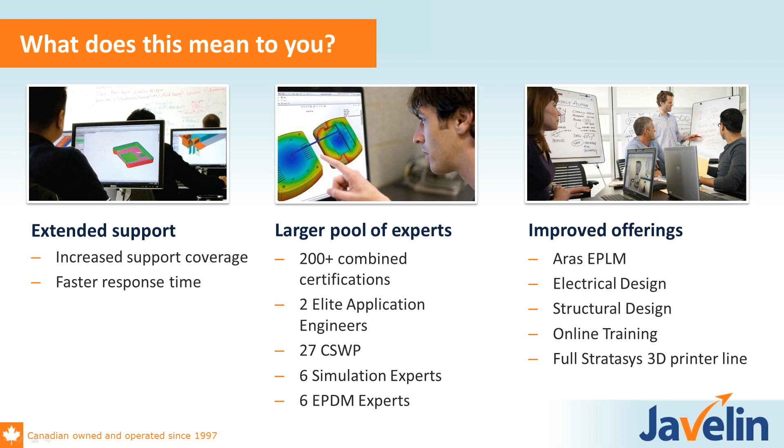Lastly, I did want to announce that Stratasys has purchased our supplier Objet for 3D printing, so we now have access to the complete Stratasys product line. That's really exciting and great new technology we can share with you.

On the training front, we have a number of new offerings we've been working on this year. We have flex day programs where customers who aren't sure exactly where to allocate training purchase a bulk number of days in advance and can allocate them per student per course after the fact. That's quite nice. Online training has been a growing area for us, especially for advanced courses or ones that are difficult to fill a room for locally - we're able to host those more regularly across the country, which is nice.

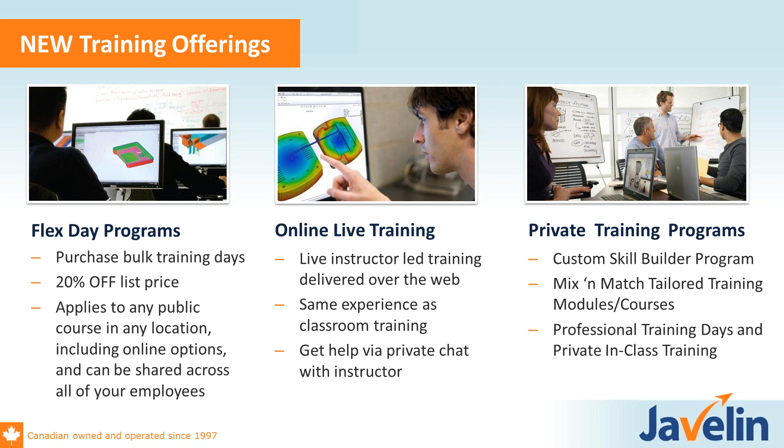And then of course custom stuff for you - custom skill builder, mix and match programs. The idea is to take the content and skills that we have and align them with your industry and requirements to take the next steps with SolidWorks.

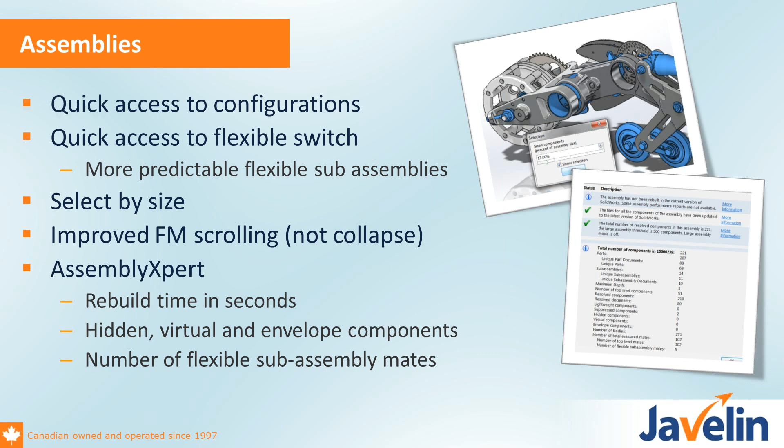Working with mates, there's some new options with how we're viewing mates, so you can view them based on a selection on edges or features, so you can see what interacts with it.

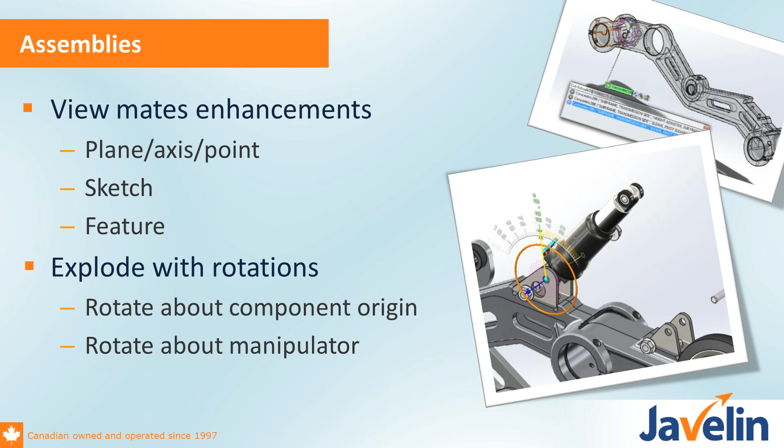Probably one of my favorite enhancements in assemblies this year is this new rotation explode. In the past, we could just pull it linearly along the axes, and now we can rotate around an axis or a circle, and that makes it really easy to communicate step-by-step assembly instructions right with core SolidWorks.

There are some improvements with how we handle messaging for in-context sketches. You'll get warned if you're editing a sketch right at that assembly level, so you can think twice. Maybe you want to add that in the part, which might make more sense in many cases.

Lastly, there's some really nice improvements to mirror components. This has been an area of development for a good while. We've seen more and more go into mirror over the years, because there are so many customers out there that have symmetric design, so it makes sense to support really everything that way. We have a whole new list of areas that we're supporting.

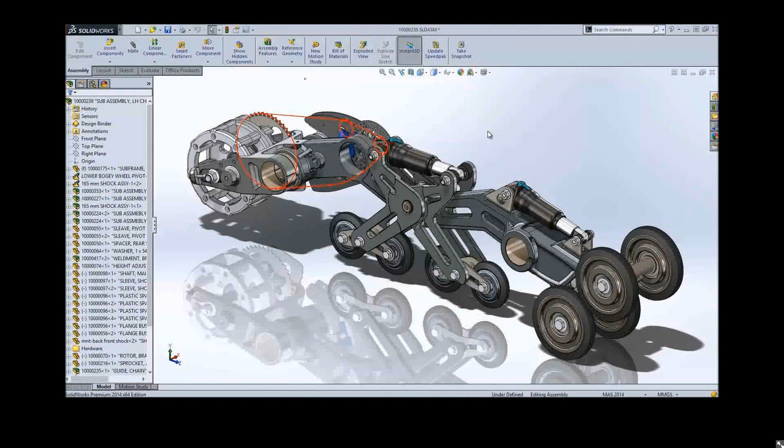So yeah, we'll get right into this with some what we call assembly delighters. Really these are things that SolidWorks has added in 2014 just to make it a little bit easier and a little bit more fun for us to use SolidWorks 2014.

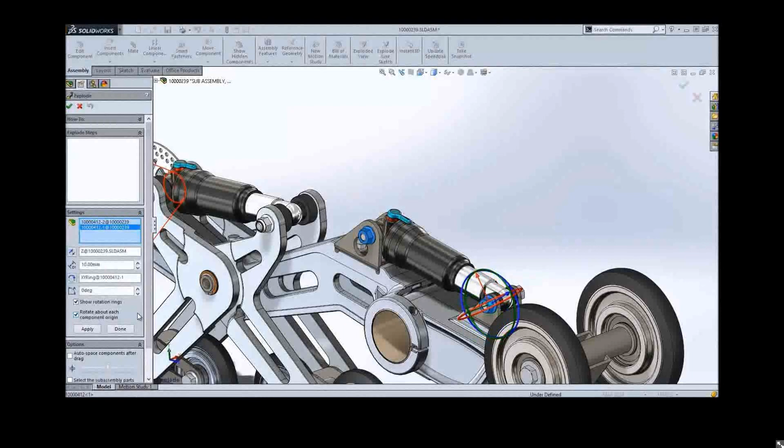First, as Eric mentioned, the new explode or rotate explode command is now available in 2014. You can take advantage of this to do a lot of different really interesting things when you explode components. For instance, these two nuts here, we can actually pull them off and have them rotate as they're coming off, so it looks like they're unscrewing when they come off.

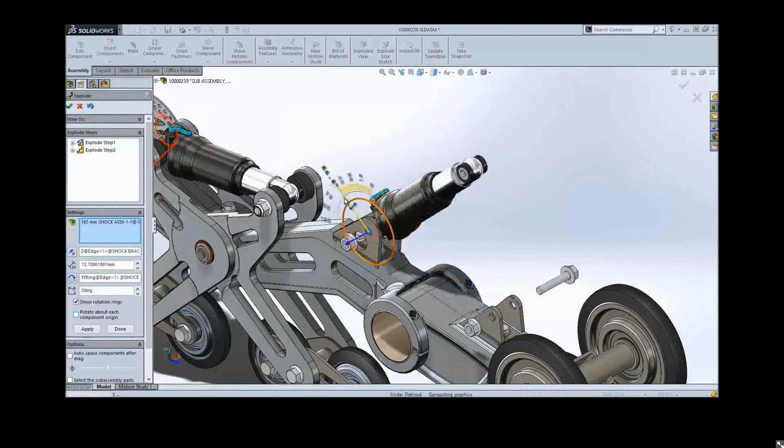And then of course we also have access to the regular linear explode too. So this triad that we're used to now has arrows and rings. The rings basically allow it to rotate, and the arrows allow you to pull it in some linear X, Y, Z direction. You can have a combination of both rotate and linear at the same time, as we showed with the nuts.

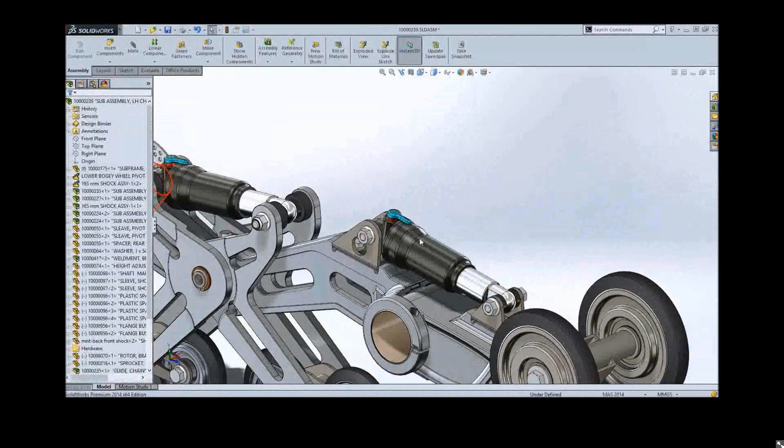So it does offer a really nice way to show this. I love to animate these explodes, especially now with rotate explode. It's a really good way to convey how to take apart or assemble your machine. It's a really nice feature, and one of my favorites in 2014.

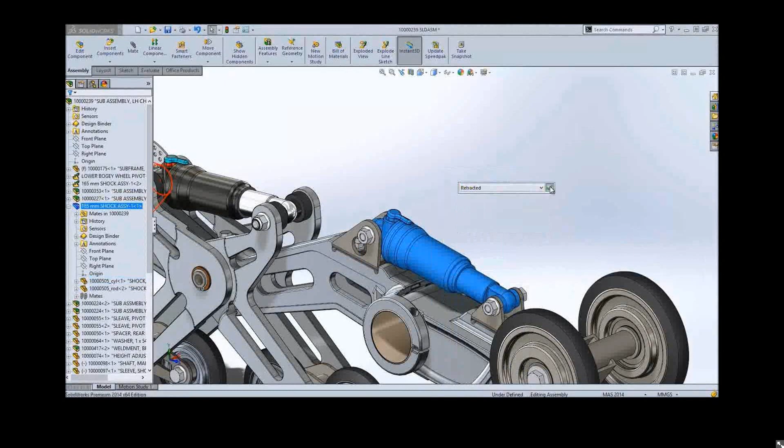Also, as Eric mentioned, when you're identifying and changing configurations in the assembly, it's now much easier because they're accessible right from the context menu. So now all you have to do is click on any component, and automatically it'll have a pop-up where you can choose the proper configuration, so you don't have to right-click and go to Properties.

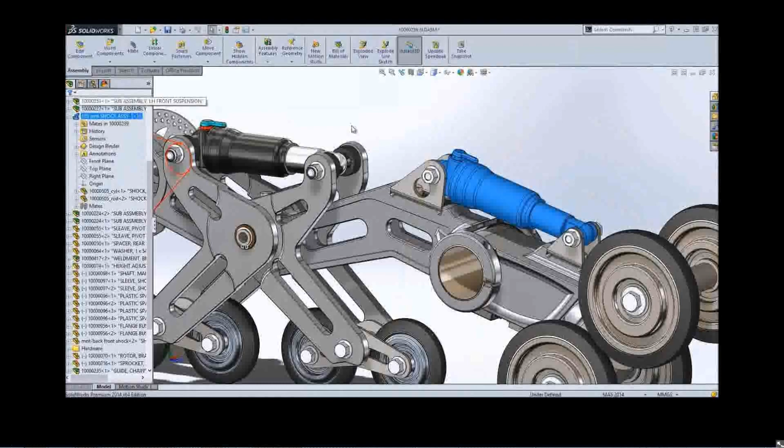It's a lot quicker to choose configurations, and also for flexible subassemblies, there's now a separate button for that, so you can make assemblies flexible without having to go into Properties. Some really nice things - I'll wrap it up there for the assemblies, but really just explode, rotate, configurations, flexible. They're really making everything a lot easier for us to control our environment in 2014.

So next up on the assemblies is discussion on mates. There's some really nice enhancements with just how easy it is to work with mates. They're constantly trying to make it easier because that's just an area that we spend so much time driving within SolidWorks when you're working on the assembly level.

First off with Smart Mates - if you recall, Smart Mates is where you can drag faces on top of other faces by holding down the Alt key. You can even do that if you have a part open in another window and drag it into an assembly by whatever face you're holding, and you don't have to use the Alt key in that case. But regardless of the method, the Smart Mate functionality used to always snap to everything, and what they did is add an option so you can now control the sensitivity, which is really nice to make it more usable. The Smart Mate button, also on the default mate behavior.

There's some nice enhancements where it will automatically select a default mate that does not over-constrain the design. In the past, you could have defaulted to coincident, which didn't always make sense. And on concentric, similarly, axis to cylinder helps out.

There's working with the mate dialog - you can have it pinned. A very nice new thing is working with the quick mates. This is a brand new way of working with mates that's just going to make it much quicker to go and add them where you need them.

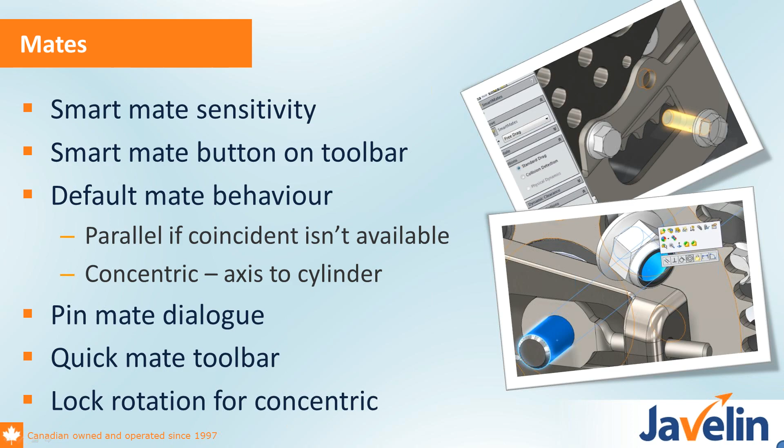All right, well let's see this in action for 2014. As Eric was saying, really in 2014 they've improved a lot of the methods that we use to mate assemblies together. So not necessarily the mates themselves, although there are some great new ones, but also the methods that we actually use to create those have been improved.

So in SolidWorks 2013, when you use the Alt drag method, known as smart mating, the components tend to jump around a little bit when you move this over. When you use smart mating, it's going to try to lock it onto every single hole it passes when you drag it over. This behavior was a little bit annoying because it was kind of jumpy.

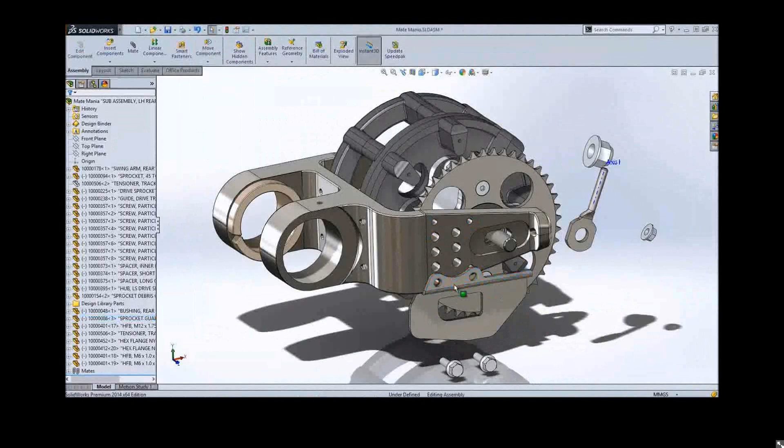So they added something in 2014 under the options to control the smart mate sensitivity. Basically this acts somewhat as a time delay. So if you hold down the Alt key and drag a part around, it's not going to jump all over - you're actually going to have to hold it and hover over a location. And if you hover over for a certain amount of time that you set up in that smart mate sensitivity option, then it will apply that smart mate. So it just makes it a lot smoother.

And another method for smart mating has been around for a couple of years actually, but it wasn't really readily accessible. And it's actually inside the Move Components command.

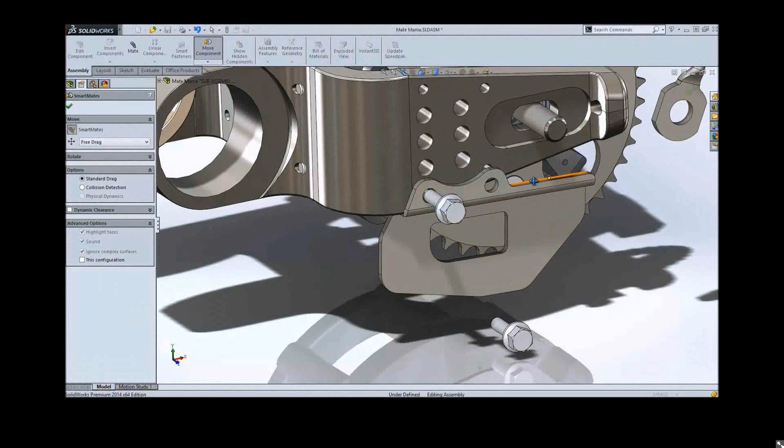So with this method, you can actually just double click on a reference and then click the corresponding reference, and SolidWorks will present the mate toolbar. This is under Move Component, and double clicking will actually add these mates.

There's also an option, as Eric mentioned, to lock the rotation when you're adding a concentric mate, which can really be beneficial when you're adding screws, nuts, or bolts. So they have a lock rotation option now.

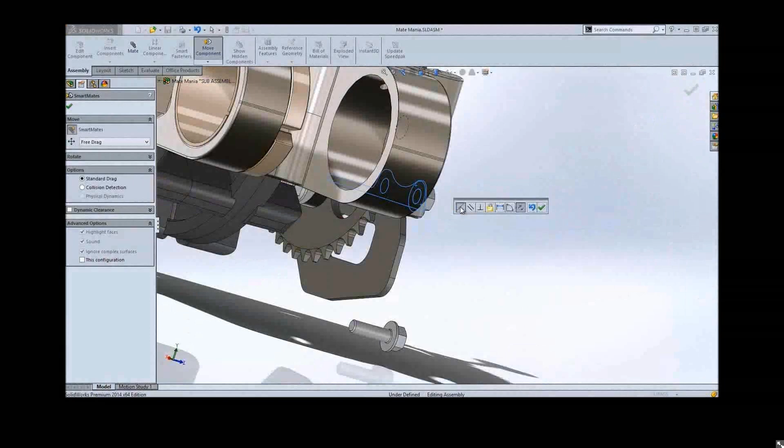One of the benefits of the smart mate method is that you can rotate the model around while selecting the different mate references. This can't be done while using the Alt command, because you'd have the Alt key selected and be trying to rotate at the same time. So different mate methods can be used in different circumstances to achieve more fluid mating techniques.

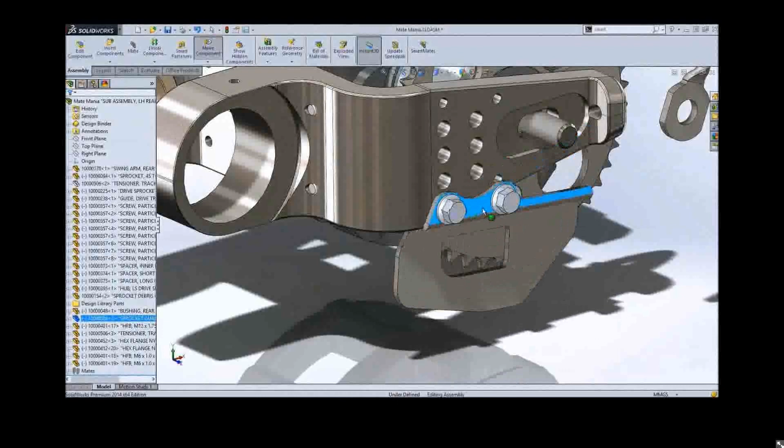We'll add one more mate to control the rotation of this bracket, using a standard mating technique to show something new. When you add a mate between the two edges, SolidWorks now defaults to a parallel mate instead of a coincident mate.

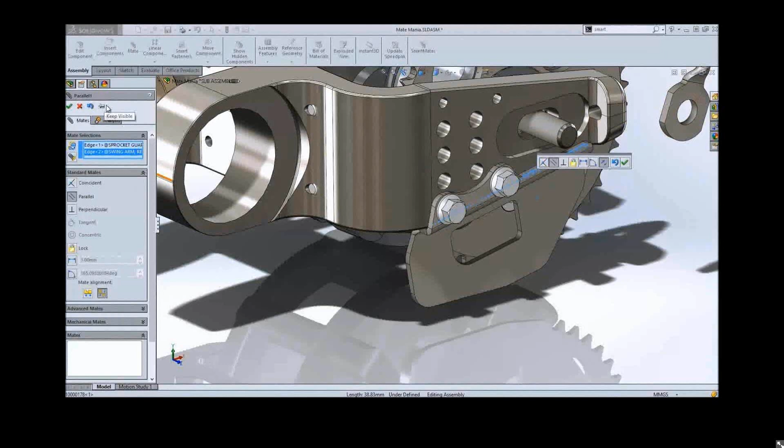A coincident mate would have overdefined this by default, so SolidWorks 2014 is actually so intelligent it knows it would be overdefined, and it defaults down to a lower mate of parallel, so it doesn't give you any of those errors. It's very intelligent now, defaulting to mates so as not to overdefine the model.

Also, when you're mating an axis to a cylinder, the mate type is now automatically defaulted to a concentric mate as opposed to coincident in 2013. Again, just a little bit more intelligent — it knows when you're mating an axis that you probably want it to go down the center, not just stick to one of the edges or sides.

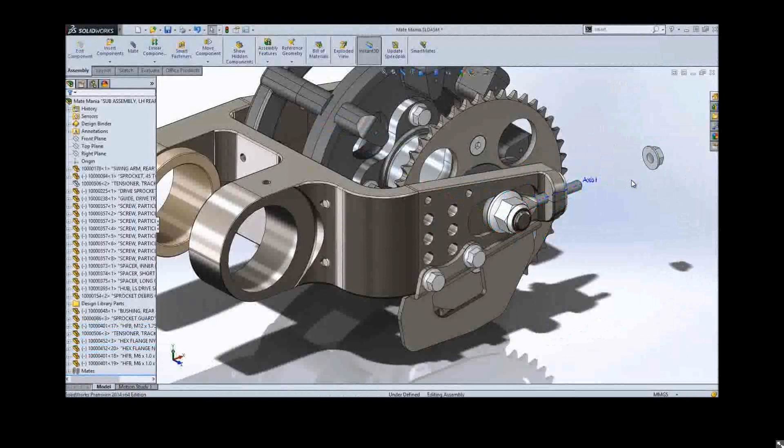Now this gets to my favorite part of the new mating in 2014. They introduced a brand new mate method called quick mates. Quick mates don't require any commands or buttons — all you do is hold down the control key and click on two surfaces or an edge and a surface, and the mate dialog will automatically pop up.

So here I'm not pressing any keys, I'm not doing any shortcuts. All I'm doing is clicking on two faces at the same time, and SolidWorks will automatically ask me which mate I want and apply that mate for me. It's a really nice, quick way of adding mate types, and this has now become my favorite way of adding mates throughout SolidWorks 2014.

So overall, a lot of really nice ways to add mates, and more intelligence as well that 2014 offers us in mates.

All right, so we do have some exciting news about mates as well, related to the new mates coming out. I'm always excited to have new ways of relating geometry and get that design to behave the way that you want.

The first mate we're going to discuss is the sphere mate. If you do have spherical objects in your design, you're going to open up a whole new array of possibilities with constraining them to geometry. You can put them along sketches, sphere to sphere, or along complex faces and have them stay on that face — a whole new set of possibilities that weren't available before.

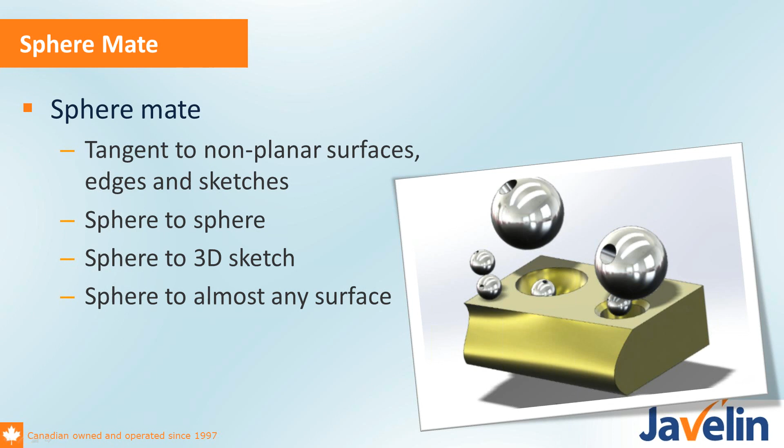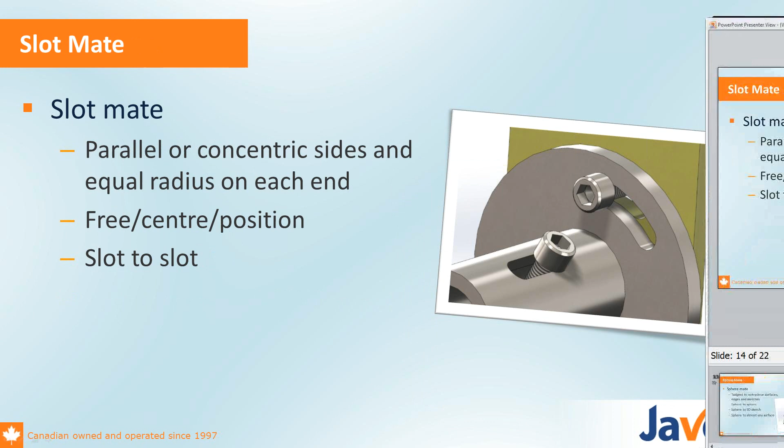We also have the possibility of working with slot mates. This is a brand new mate, and out of the two, this is the one we're going to be focusing on and showing you today. You do have the ability to do parallel or concentric sides that are equal radius with a slot mate, so you can make it behave as if you have a slot in your design. You can actually mate a slot to a slot as well, which opens the door to capturing exactly the way it behaves in real life.

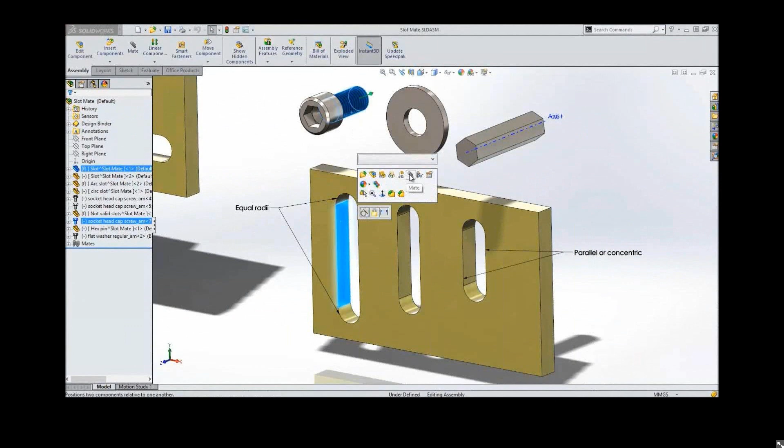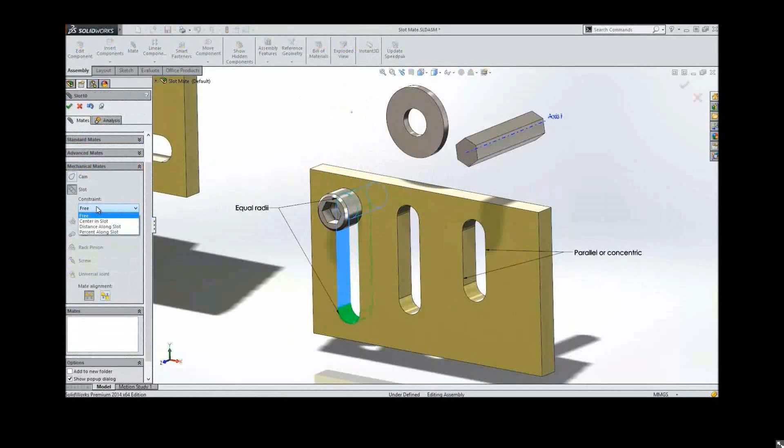The only requirements for a slot mate are that the sides be parallel for a straight slot, or concentric for a radial slot, and that the radii be equal. So basically just normal looking slots, nothing too funky with varying patterns. All you have to do is select a cylindrical face or an axis on the slot, and under mechanical mates you can choose the new slot mate.

I'll set this one to free slot mate just to show what happens. You can drag it up and down, and it will stay within the slot — it won't go outside of it. Even if you pull it up to one end of the slot, it's not going to jump outside. It's going to know that the screw has to stay inside of the slot.

If we change this to centered in slot, this locks the screw to the center of the slot. But of course you can still rotate it around, so we could use the new lock rotation option to lock that if we wanted, as shown previously.

Distance and percent along slot are pretty straightforward but very powerful. Distance will be a certain distance from one end or the other of the slot, and percent will be a percentage. Personally, I like the percentage a little better, because if you change the size of the slot, it'll still be relatively in the same position compared to using a fixed distance. But there are a lot of nice ways you can use both.

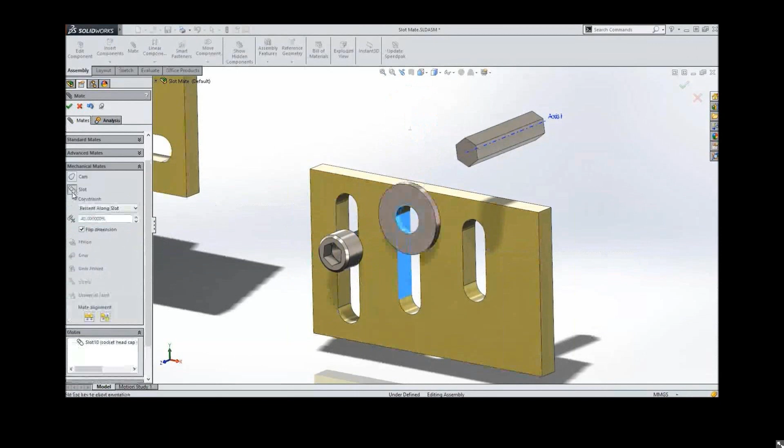There are also other items that can be mated to a slot, such as holes or the bore in this washer. You can even mate an axis into a slot mate as well, so the part itself doesn't even have to be round or cylindrical — anything with an axis can be mated into the slot mate tool.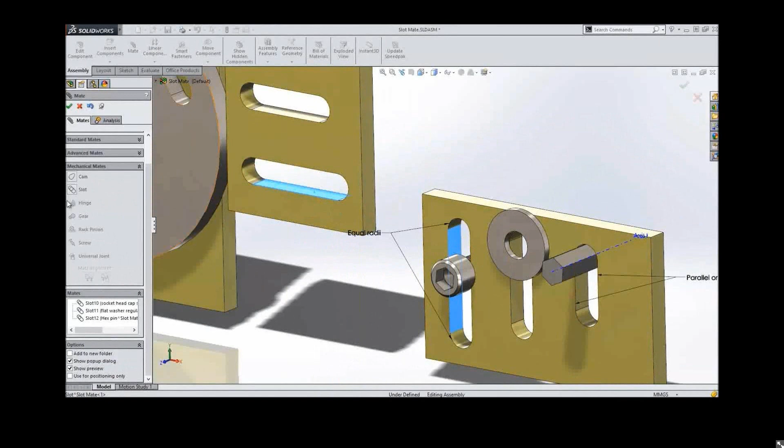It doesn't even stop there — you can also mate slots to slots, which is really neat. It gives you this X, Y sort of rotation, and again it will stop when it gets to the edge of the slot. It really gives you an accurate representation of how your machine will work if you're having slots in it and how they move around.

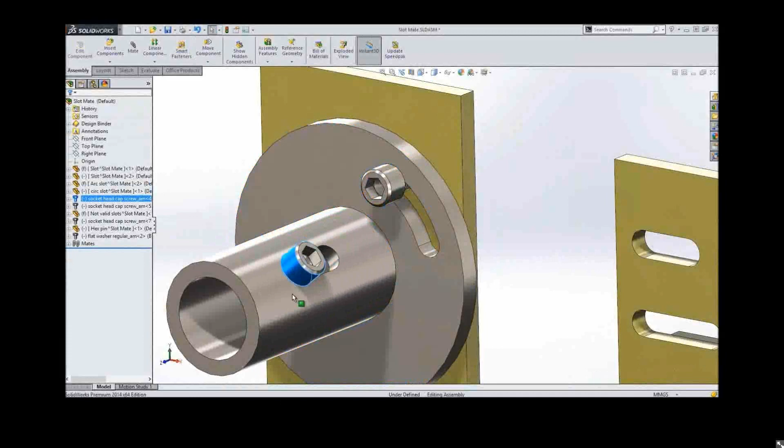Also, radial slots can be mated to other radial slots, which is really neat. When you rotate this part around, you'll see that the radial slot actually rotates until it hits that bolt, and then pulls the bolt along with it, just as it would in real life. It's kind of like a physical dynamics simulation, but works easier with less graphical or processing power behind it — a quicker and more efficient way of adding this.

There are a couple ways you can't use the slot mate, highlighted here in red. You can't add a slot mate to these because either they have square ends, or they're off the end of the part, or they're both straight and radius — they have a line and another curve in them. But other than that, you can use the new slot mates, and you can add these slots under the hole wizard.

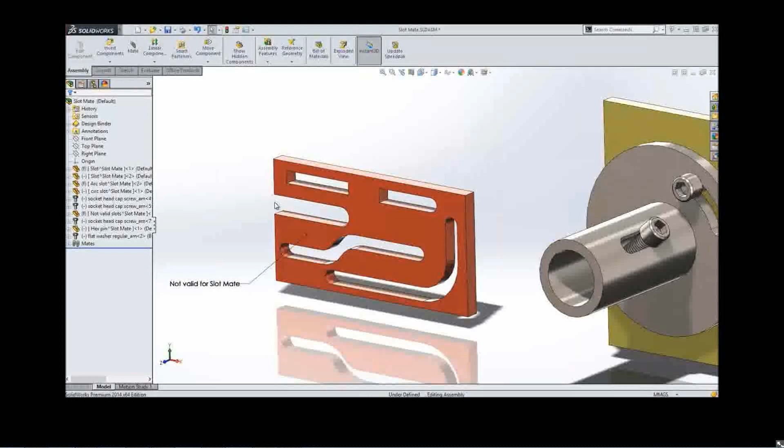We keep joking around that I wouldn't be surprised if some of those areas that we can't support today in slot mates, we're going to see as new enhancements in the 2015 or 2016 release, because there's a lot more possibilities when you start getting geometry behaving really like it would in real life. So why stop with simple slots?

Let's continue with quick announcements about the patterning side of SolidWorks. In the past, there were some limitations with how you could pattern in an assembly. There were many more options when patterning within a part with geometry. So what they've done is leverage all the ways that we could pattern in a part, and the ones that are applicable, pattern in an assembly as well.

So you can now do sketch-driven patterns, curve-driven patterns, a pattern-driven pattern if you have a piece or a part that's following another part that's been patterned as well. And there's really nice feedback as you're going, including highlighting the seed of your pattern in purple instead of blue, which is quite nice.

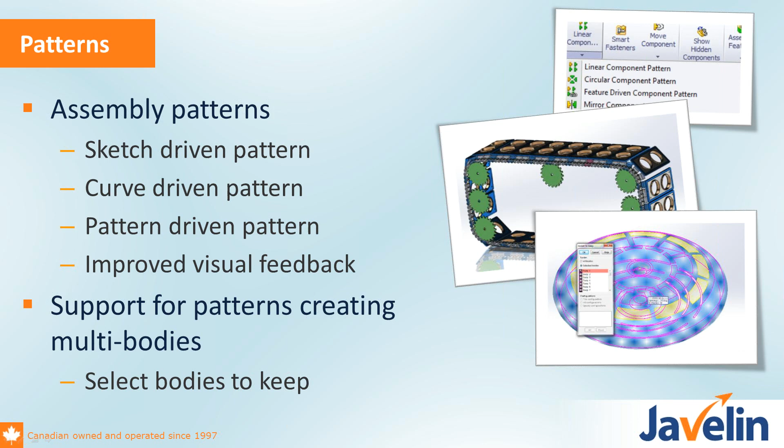When you're patterning multi-bodies, this is more of a part enhancement, but we thought we'd talk about it here. We now have better flexibility with what bodies you're keeping or deleting. So if you do have cuts that are making multi-bodies, that's going to give you some extra functionality there.

Now, costing is an important part of designs as well. We talked to many customers over the last month about costing. The feedback that we've generally got from customers is that costing is an area that hasn't been used to date, but they said costing is extremely important to my business. So are there ways that would make it easier to use and add value to the business?

I think everybody is on the same mind frame saying, yes, it'd be great to get better knowledge on what the cost of parts are, but we want to do it with minimal investment in your time. So a couple things related to enhancements in costing are directed exactly there.

The new volume costing is just a very quick way of producing estimates. You can get the volume of your material or blank that's required, as well as the volume of material removed very quickly, and that gives you a sense for machine parts—just quick ways of approximating costs. It's not necessarily the exact cost of the part, but it's a great way of approximating relative costs. Similar to the way we use simulation or analysis in many cases to figure out if a design is good or bad, this costing functionality will give you a really nice sense of what a more affordable design is or not.

So getting that knowledge down to the more junior designers would help out. Template setup will also help out a lot, so being able to share costing with customers that you are doing quoting for, or vice versa. You can now share templates and lock them down to share with limited access, so that you don't have to share in-depth knowledge on where that costing comes from.

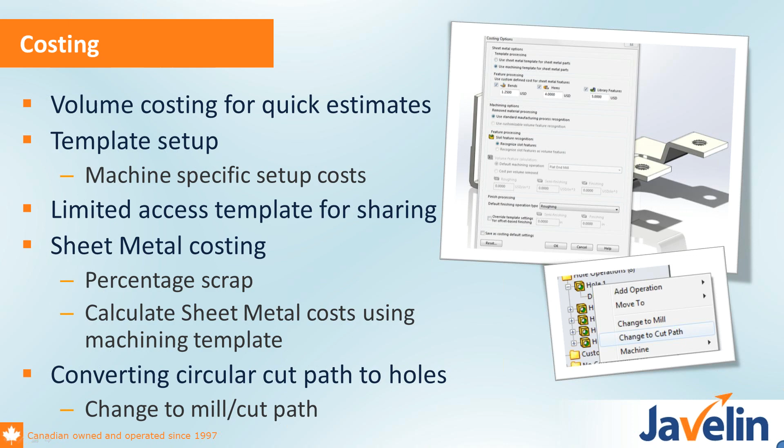And then of course there are some nice enhancements with just working with sheet metal or cut paths, just making it easier—like incorporating percentage scrap, or a nice one is switching between mills or holes very quickly back and forth. Overall, they're making costing much easier to get value out of with minimal effort. That's really what it's all about today. This is an area that we believe SolidWorks will continue to invest in because cost is just such an important factor at your business.

All right, let's see a little bit of this in action in 2014. They have done a lot of really nice things in 2014 on the costing front, just as Eric mentioned. They've streamlined a lot of the workflows to help you set up your costing templates a little faster, and they've added a brand new way to calculate costs—so they're expanding both fronts on costing.

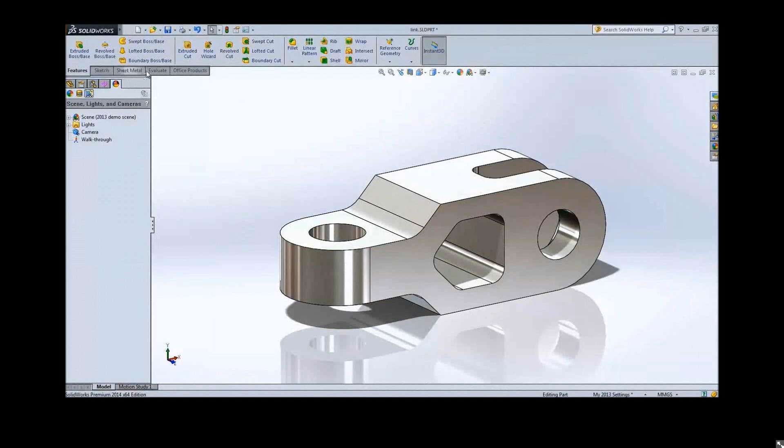One area of focus was volume costing that we mentioned. Volume costing was added in SolidWorks 2013, but it still required a template for the volume costing. What they've done in 2014 is remove the need for a template, making it a lot easier to get into the costing feature and start getting rough estimates of your costs. As you can see here under traditional template costing, which is the way costing started out back in 2012, we have over on the left a couple of these features that have no cost assigned.

So this could have happened for a couple of reasons, but most likely within the template there wasn't an accurate cost for these features, so the costing program just didn't know how to calculate them.

With SolidWorks 2014, you can now access costing options directly from the task pane. All the options are broken down into three areas: sheet metal, machining, and finishing. Your costing control is now a lot more accessible, with everything under one options menu instead of under the parts or document options. So let's take a look at a couple of machining options first.

For each part, you can control whether SolidWorks costing uses standard manufacturing processing or volume costing. That standard processing, or what I like to call template costing, gives you some no-cost assigned features. With standard recognition selected, you have different options to process slots as slot features or as volume features.

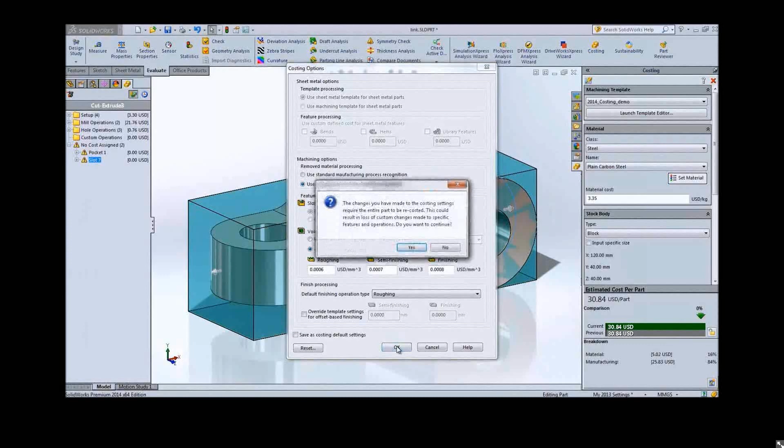When you select that method, the part is actually recosted. You'll notice on the left there are no more no-cost assigned features, because it's very simple. It doesn't need to recognize every single feature and assign a cost to it. It just looks at the volume of material removed from what you started with to create this part, and then assigns a relative cost to it.

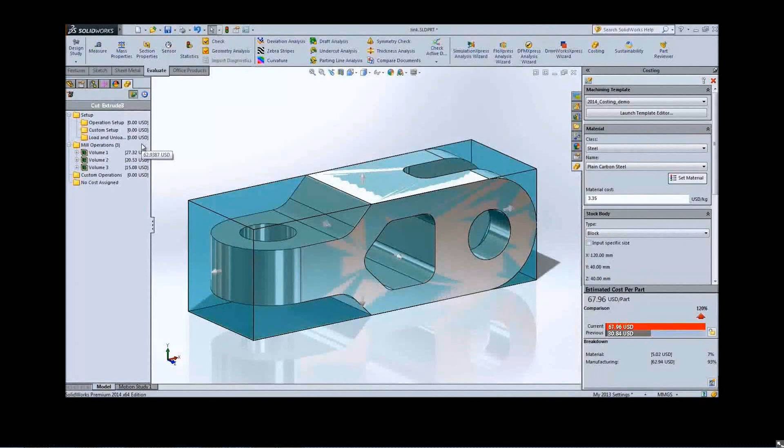So again, a really nice, quick way to do it. You're not going to have any errors, and it's a really quick method just to get information from your parts. If you don't want to go create all these templates and plug in all the numbers, definitely check out the volume costing option in 2014, because it's a really nice way to get into the costing world without a lot of upfront work.

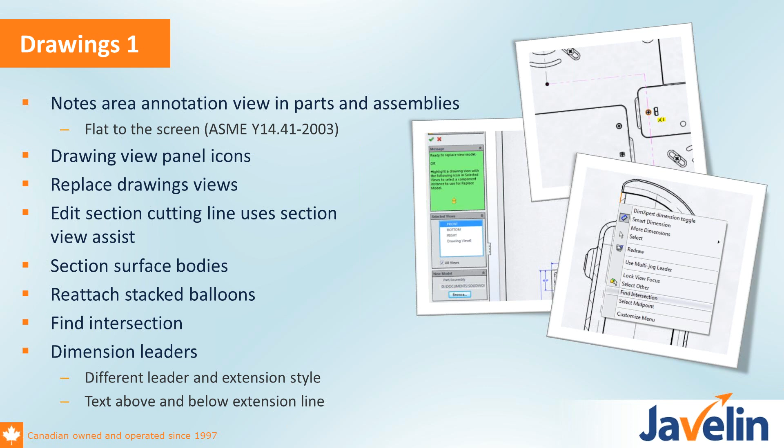And getting that text above and below those dimension leaders, and doing different styles of your leader lines, helps out as well. When working with notes, there are nice enhancements with uppercase, working that way and being able to switch very quickly.

You can attach a note to any view, which is nice, and it's much easier to bring back the labels. So if you ever, it's always a pet peeve, or was a pet peeve of mine, if I accidentally deleted detail B, scale 2 to 1 that you see on that screenshot, it was very difficult to bring back. Now you can just go into the label tags and bring back all those labels that you want.

With the slots we talked about before, we now have slot callouts, so that goes hand in hand. Those are the slots that we were talking about yesterday, just to clarify.

Doing angular dimensions, it's easier to work with angular dimensions, and also angular ordinate dimensions are much easier to work with.

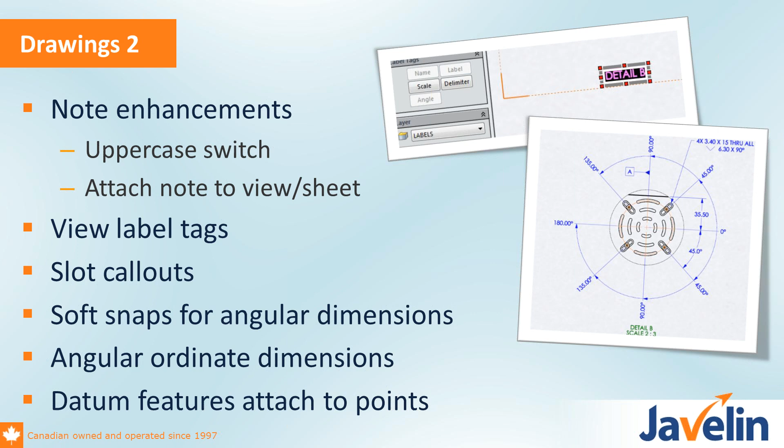And lastly, on a few extra things, working with your sheet formats, you can now have a secondary sheet format as a default for those second or third pages on your drawings.

And on the BOM, a number of enhancements with how we're sorting and working with Toolbox, but personally my favorite is the automatic split. You can predefine a BOM to have so many lines, so if you know that only 50 lines of the way you have your bill of materials fits on your drawing, it will automatically start wrapping and fill up the remainder of the page.

So those of you who have bill of materials on a separate page in your drawing package, this is fantastic functionality that's going to make your drawing formatted more accurately out of the gate. You don't have to go back and start slicing and dicing and splitting your BOM the way you want. So with that, we'll let Jake take it away.

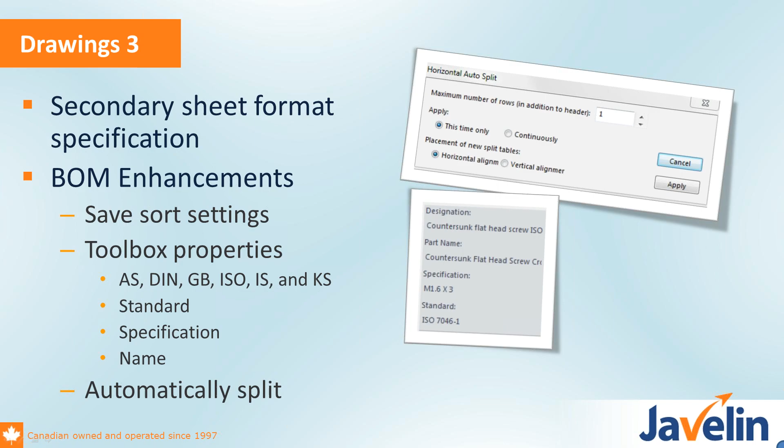All right, let's look at some drawings in 2014. First, before we actually look at the drawings itself, there's one enhancement they've done to 2014 that relates to both parts and assemblies. And this is a really neat one. I've played around with it, and I'm definitely in love with this enhancement.

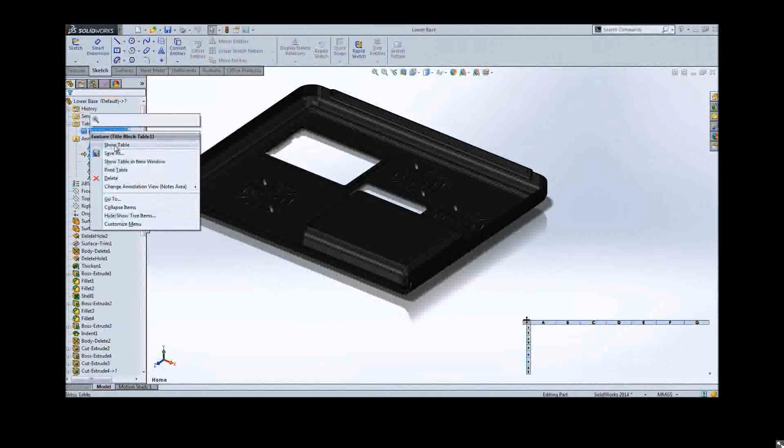So basically, when you're not in a drawing, when you're just in a regular part or an assembly, if you want, you can put a sort of title block area under the annotations. There's a new notes area annotation. So basically what you can do is insert a table there, and this notes annotation will stay flat to the screen at all times. So even though it's a 3D part or a 3D assembly and you can rotate it around, you can have this title block looking back at you that's always flat to the screen.

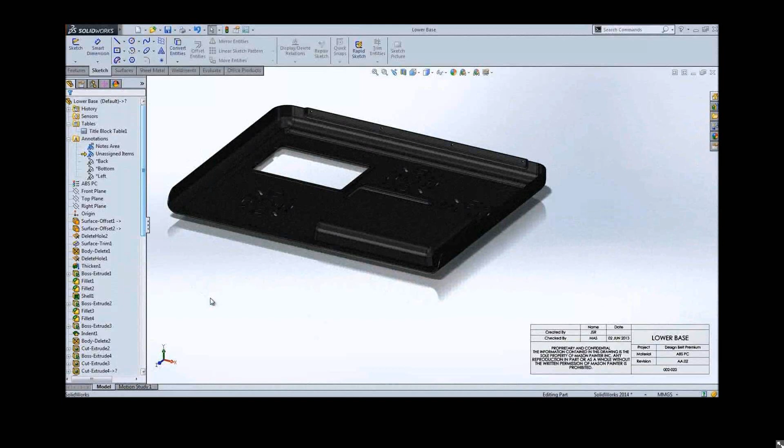So in some cases, you might even get away without making a proper drawing if you just wanted to use this notes annotation. It doesn't rotate, it's static, and again, it's under the annotations pane. Basically you just insert a table and you can insert that there. So a really nice enhancement if you don't want to go right into drawings.

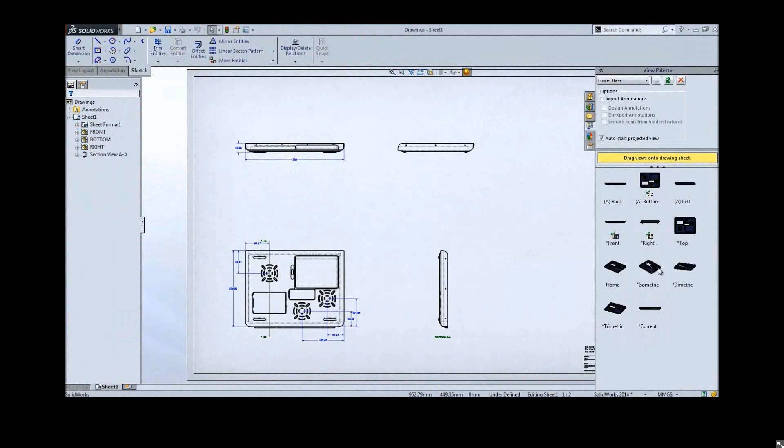But back in drawings, the view palette icons - the view palette now, when you drag across the view icons and use one, say a top view or a bottom view, previously it would delete this icon. So basically it would not allow you to have two of the same views. You couldn't have two top views in your drawing because it would delete that top view icon. So now in 2014, it allows you to drag out as many of the same view as you want.

So it's not going to delete those view icons. You can have two top views. So for instance, if you wanted to have one top view and detail the left half, and one top view detail the right, you could do that. It's not going to stop you from doing that anymore in 2014.

Also, with replace model view, there's been a decent amount of time that we put into this drawing. We've got some dimensions, a lot of different views, a little bit of annotations.

So we don't want to lose all that, but we want to replace the model with a different one. Maybe we started this drawing and then later on we added a bunch of components and turned it into an assembly, and we say, gee, I really wish I could reuse this drawing but just with a different model or assembly. Well, you can now in 2014 with replace model.

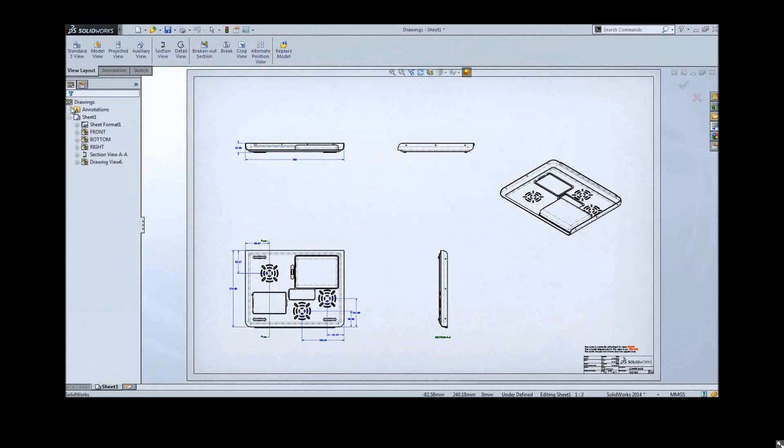If the part you began dimensioning or detailing is actually contained within the assembly you used to replace it, it will reattach every single dimension and annotation. In this case, I started with the bottom cover, bottom plate of a laptop, and then replaced it with the entire assembly. The assembly contained that bottom plate, so it was able to reattach all the dimensions, all the views, and everything. This is a great way to start off and add detail as you need it, or even replace entire models or assemblies. So every view will be updated, and it's a nice way to kind of start off.

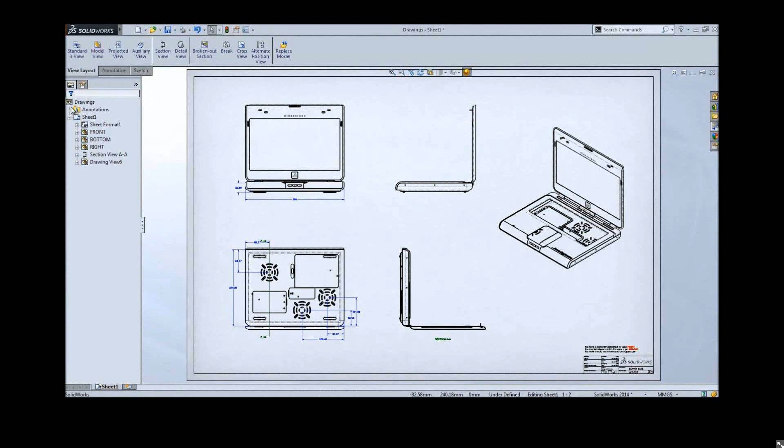Again, if you want to start with a part, you can turn that into an assembly without worrying that you're going to lose all of your drawings in the future.

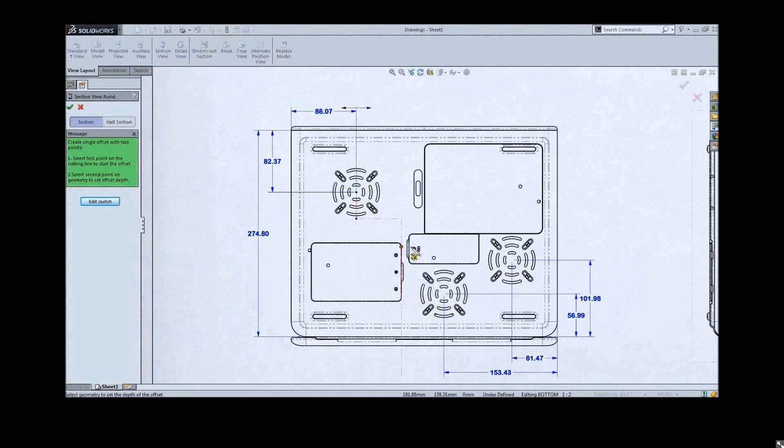Also, with a completely new model, it often requires adjustments to the section view and the bottom view. In 2013, we introduced this brand new section view assist, basically a section view wizard. So you could create section views very easily in 2013, but you couldn't edit them with the same tool. Now you can use that same tool to go and edit those section views the same way.

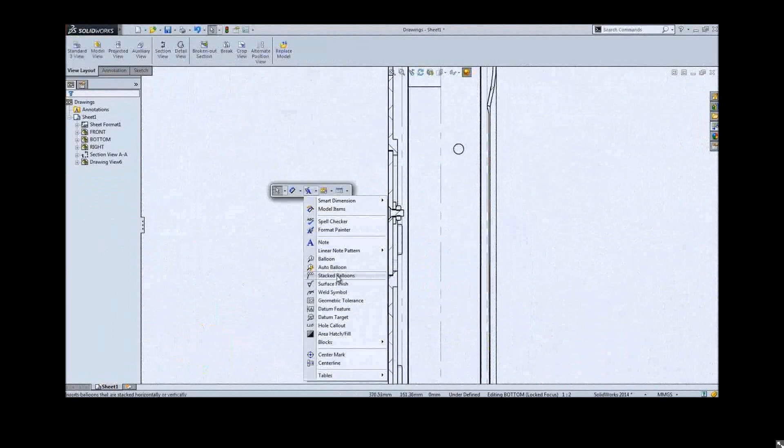Also, if you work with stacked balloons, which is a nice way to create clean drawings, clean bill of materials with stacked, and also show the assembly order using the stack up, you're going to like this feature.

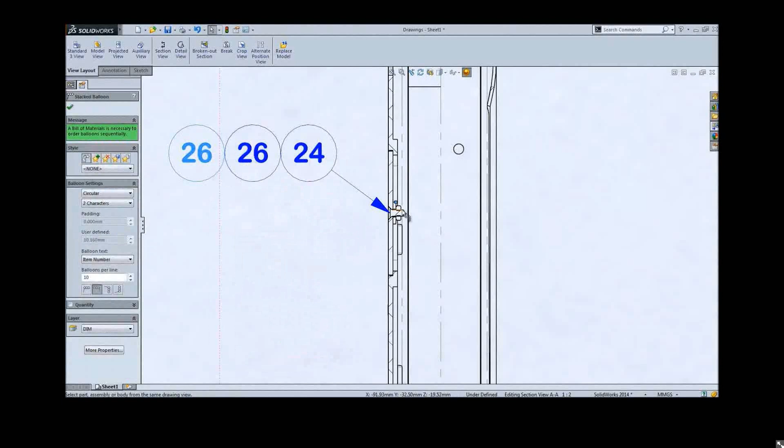Now if you want to reattach to a different part, you can do so just by right-clicking on a stacked balloon and saying reattach. You can attach them either in a different order or to different parts altogether. For instance, if you change the screw here or the lock washer, previously in other versions of SolidWorks, you'd have to delete all of the stacked balloons and then re-add that stack. Now if there's an error, you can just reattach it to your new part and you're good to go. You don't lose any information.

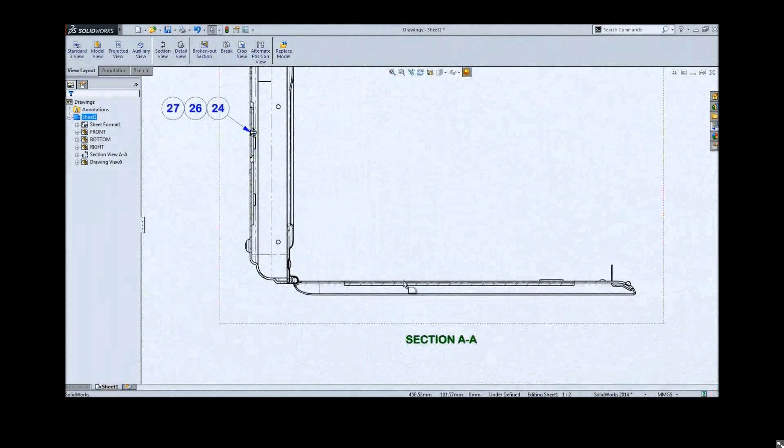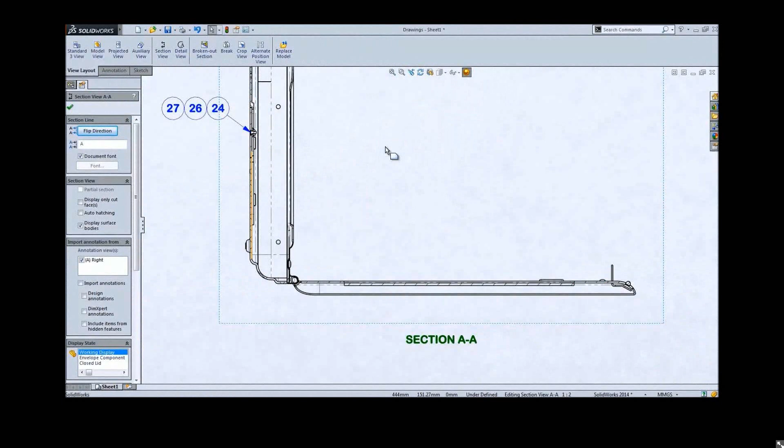Also, section on a surface, where if you start with a surface body, which a lot of times they do, especially in this laptop case here, it's just a surface, not a solid body, we can now fully section this in a drawing. Previously we were not able to section surfaces, we could only section solid bodies, and now in 2014 that limitation is removed. So now we can section anything we want.

Also, for the intersection of dimensions - when you're adding dimensions, sometimes the virtual intersection of the geometry is really where you want to be dimensioning to. In this case, it's a very curvy laptop with a lot of fillets and curves, but we want to get the overall length. Previously we could do this by inserting a virtual sharp or virtual point, but we'd have to do that ahead of time and then go and dimension to it. We could do it, but there were a couple extra steps.

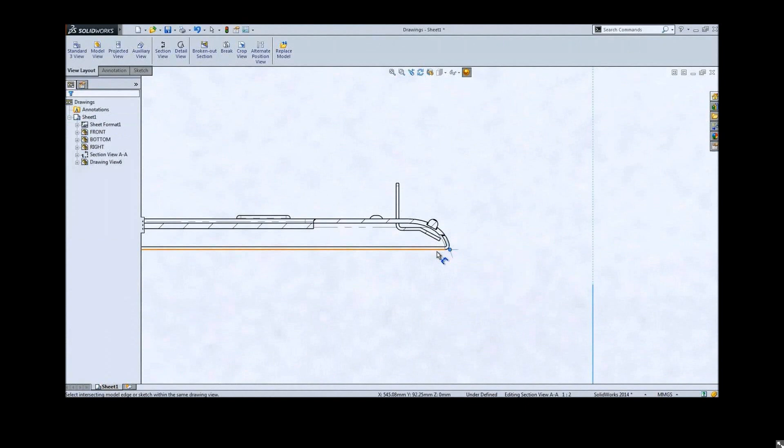Now you can actually find the intersection of two entities on the fly while you're dimensioning. If you click one, you can just go and find the virtual intersection of the two other points and then dimension right to that. You don't have to remember to do it ahead of time. This saves a lot of time, and it's going to give you more accurate results because you can find that virtual intersection automatically on the fly.

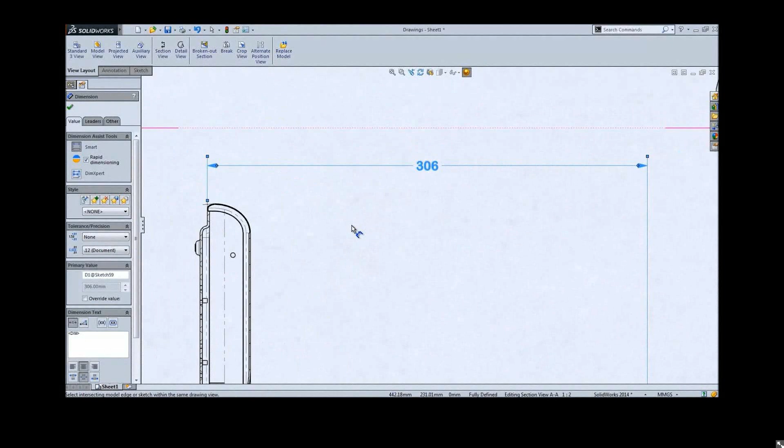Also, 2014 gives you separate control of leaders and extension lines in the dimensions. So if you want to control the line type or line width of the dimension leaders or the extension lines, you can do that specifically now for each type.

Also, split dual dimensioning - there's a lot more control now when it comes to dimensioning, where if you want to add some dual dimensions and have it split, some on the top of the line and some on the bottom, which makes a lot of sense. I use that line as a nice divider. You can do that now in 2014.

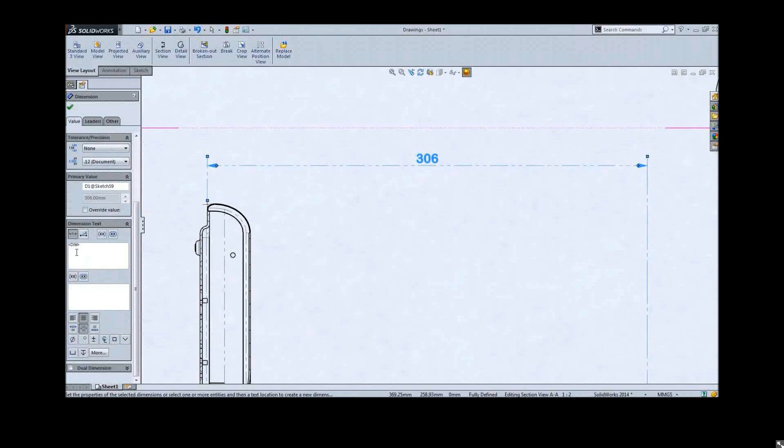You can also control text if it goes above the line, or add text below the line, for a little more control. This all stays locked into that dimension, so if you move the dimension around, the text follows along with it but keeps your formatting. It just makes things a lot easier.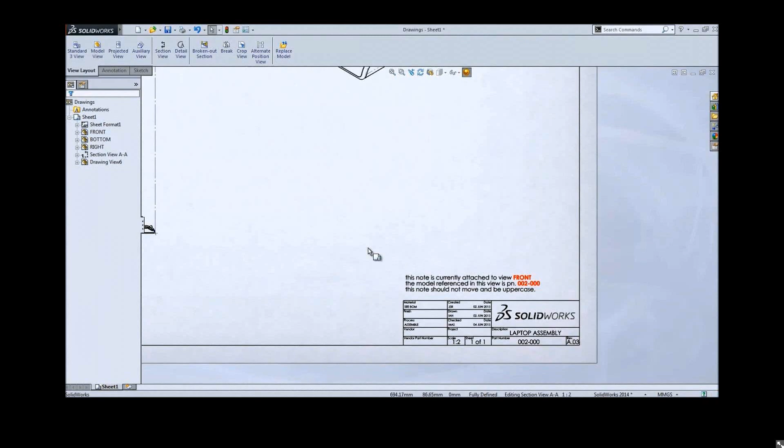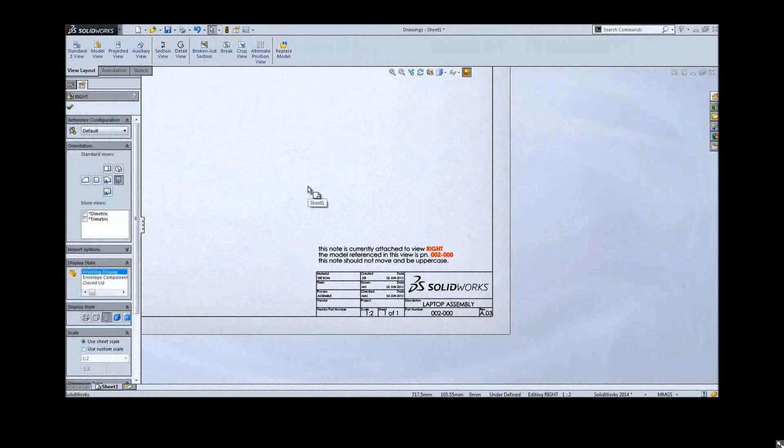Also, annotation attachment control. I actually had a question on this, and the answer is yes now. You can change how notes and annotations are attached to different views. If a note is locked to a top view or an isometric view, you can right-click it and attach it to a different view, or attach it to the sheet itself. Attach it to another view and it follows that view; attach it to the sheet and it stays locked in its own space, not moving when you drag view annotations.

So a lot of nice enhancements with drawings as well, just to get everything wrapped up for you in a nice drawing package. All right, I can't leave out simulation.

I'm curious about who out there is using the simulation suite of products, and how you're simulating or validating your designs today. If you can help us understand what you're doing, that would be great. It helps us work with you better.

We did have a number of questions about content that we skipped over today, Jake. Remember how we skipped over the sphere? And we skipped over - I noticed that. So our customers noticed. What I said in the questions, we actually went through a lot of that content faster than I thought we would, so I was thinking maybe there's a couple topics we can go back and still cover. What do you say? Absolutely.

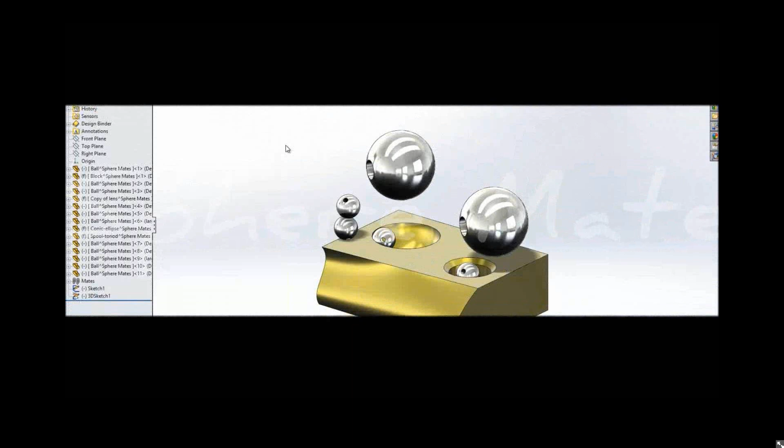For sphere mates - and they are pretty exciting, so I'm glad we get to cover this - it's really an interesting addition to the mates catalog in 2014. Mating spheres in 2014 gets a lot more interesting. In SolidWorks 2013, we were able to mate spheres to tangent faces, planes, and cones, but there were a lot of limitations.